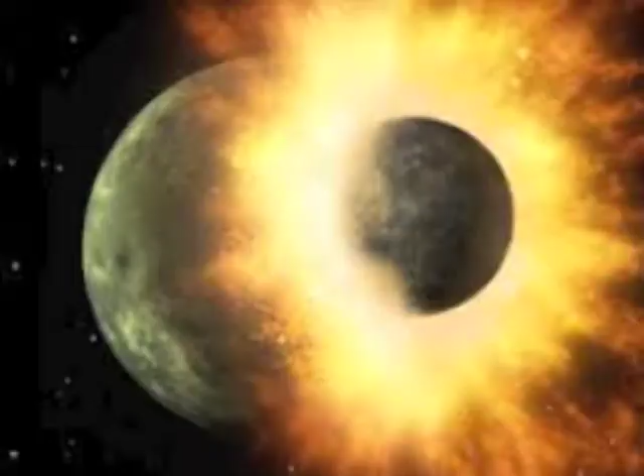I want to talk about the concepts of language, communication, and comprehension. We usually think of different forms of verbal transmission, such as French, English, German, etc. But language takes many forms.

Language can be thought of as systems of communication used by a particular community. In today's episode, we are going to look at building specialized academic language. I am going to examine the specialized language known as the welding symbol.

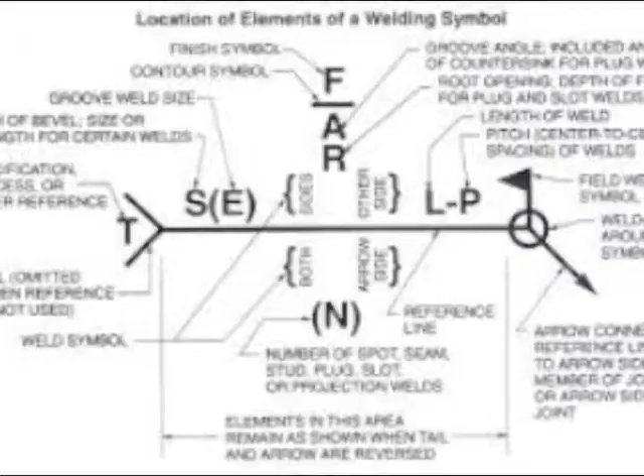First of all, language can be broken down into two forms, BICS and CALP. BICS, basic interpersonal communicative skills, and CALP, cognitive academic language proficiency. CALP requires a greater access of vocabulary and, as it suggests, is more cognitively demanding. BICS is everyday language, CALP is academic language.

CALP can be broken down in two ways: basic academic language and specialized academic language. CALP requires a greater access of vocabulary.

Blueprint reading is vital to nearly every trade. The welding symbol is a major component of a welding fabrication blueprint. Welding symbols are the language of the welding shop. They are a specialized language which allow proper and precise transfer of procedures from the classroom to the welding shop.

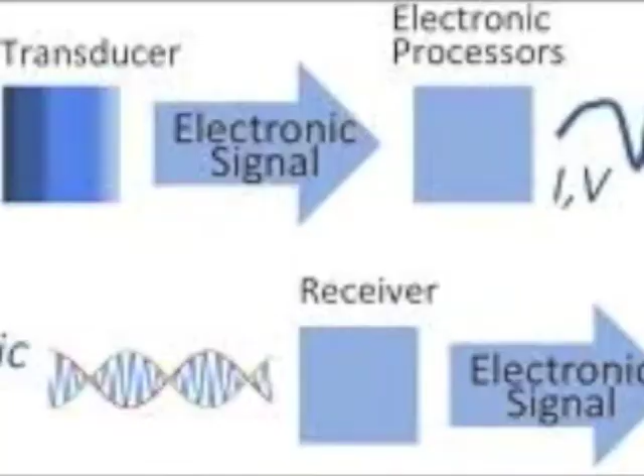To the layman, they may look like rudimentary hieroglyphics, not far off of something found on a cave wall, when in fact the welding symbol is a visual description of very specific information vital to those who have been trained and are literate in the area of welding.

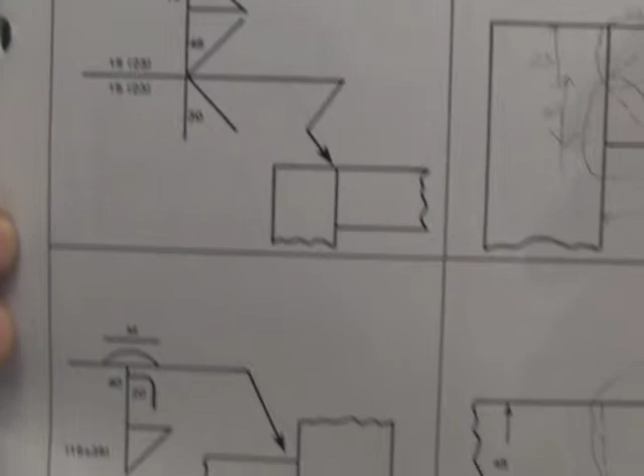The nice thing about the welding symbol is that no matter what language you do speak, the welding symbol is universal. Proper communication and comprehension is key to avoid confusion in the workplace.

A welding symbol alone requires building a language like any other language, from either the top down or the bottom up. For students to develop a comprehension of visual information, a teacher must help build a specialized academic vocabulary to support the students' recognition of the related symbols.

When teaching students the welding visual language, we must also understand that there are barriers to comprehension, and teachers must know how to support these students to overcome these barriers.

One barrier is the context-reduced situation, which can also be thought of as the classroom. Teachers should use tangible and visual aids when providing support for the transfer of classroom skills to foster an alignment of communication and comprehension. The result being, when students enter the shop or even the workforce, they are able to read, understand, and apply the proper procedures in order to produce a safe and quality product.

In conclusion, knowing when and how to use higher forms of language is important, but for a teacher, you must know how to build these higher forms of language, or specialized language. Being aware of the cognitive demands facing any student learning any language is key to helping grow or foster language and communication through comprehension.